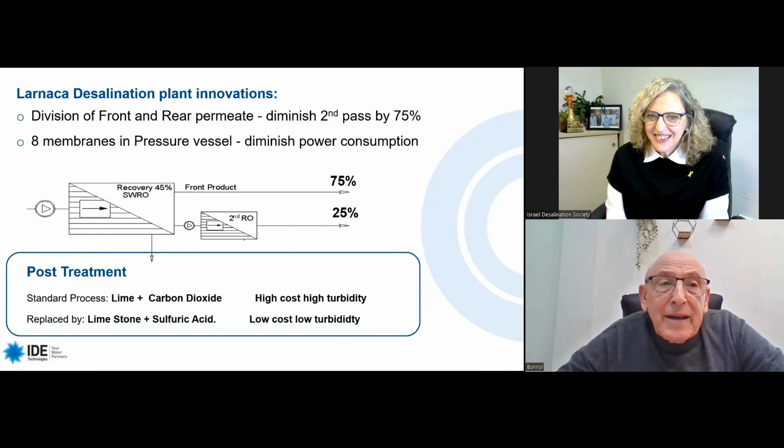But I solved this problem, and the project is working, I think right now, something about 30, maybe 25 years, a little less maybe, but maybe 20, 22 years. So this was the issue about Larnaca. I want to tell you something about Larnaca.

Yeah, okay. So I was selling membranes with Dow, and you asked for a quotation to work with 8 membranes in a pressure vessel, and then I got a letter from Dow and sent it to you, and in the letter it was written: don't even try to work with 8 membranes because it's going to be a big disaster. Okay, and as you said, you kept working, IDE and other companies working with 8 membranes in a single pressure vessel for almost 30 years.

Although people are still asking us if it is going to work, this is the moment to say, yes, it worked. Okay, so yeah, I have to tell you that also my very good friend Mark Wilf also supported me in going to 8 membranes, and he is a great person. I have to say I have had the pleasure to be his friend for a long time and learn from him, and we work together.

So the 8 membranes, part of the credit I should give to Mark Wilf. Definitely.

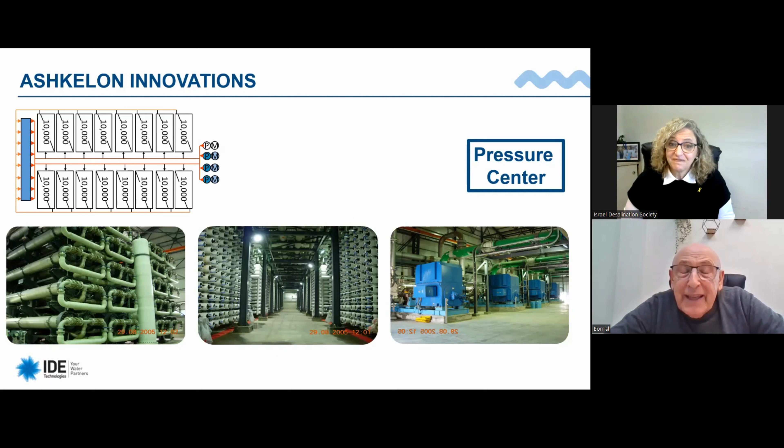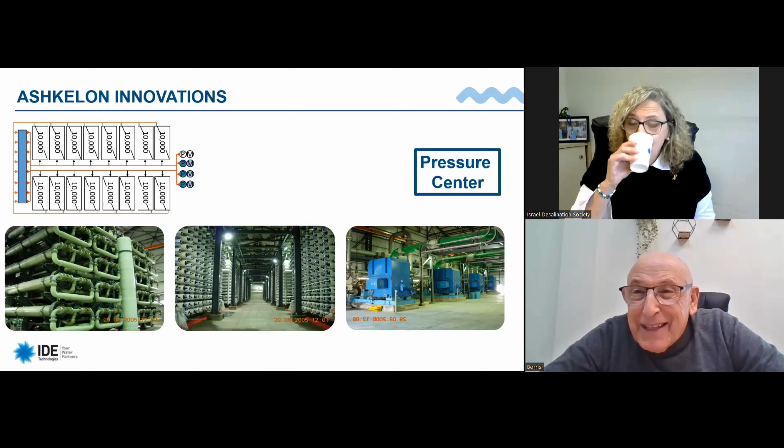I have to tell you, at this time of the tender, the ERI energy recovery didn't exist yet. It was in test. But a great person, Bill Andrews, published a paper, and in the paper he described that he made an energy recovery system with 98% efficiency.

So I explained to Bill Andrews that I'm going to pick up his innovation in the Ashkelon project and build a pressure center from it. He told me, 'You are crazy.'

But I have to tell you, Bill Andrews is a great person, absolutely great. He made his job so well. He worked on the commissioning of this energy recovery system and took part in the design of it. I have to tell you, he is a very, very high level person who helped us make this pressure center.

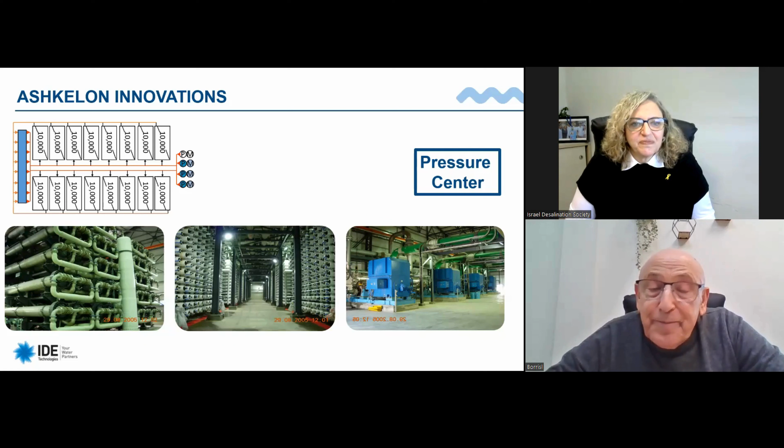In addition to the pressure center in this project, I used the Cascade, a boron removal system. You can see here in the Larnaca, we put the second pass on the rear products, but the recovery was 92%, because you cannot in the boron removal system have high recovery and high pH.

It is not possible. Magnesium hydroxide scaling and calcium carbonate scaling will plug your membrane absolutely. So it is not possible to have both conditions in one train.

Just to remind, what was the boron requirement here? 0.3 ppm, never achieved before. And before, all the technology mainly was built on the ion exchanger, which was expensive.

The difference is 6 cents per cubic meter. You will lose your project on it.

So I submitted the first patent in Israel on the Cascade, where we make 3 stages. First stage was high pH, low recovery. The next stage was high recovery, low pH.

We put acid, and the third stage was high recovery and high pH, but without calcium and magnesium, because both of them went out in the second stage. So the recovery was 98.4%, and we made this project which is still working till these days.

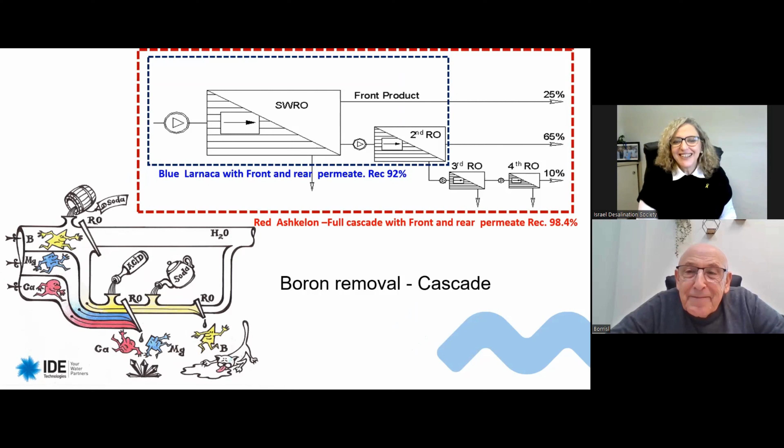I see, and I also see the very nice illustration that you are showing here, that your process is fighting with the boron, magnesium, and calcium. And no doubt Ashkelon was really and still is an emblematic project.

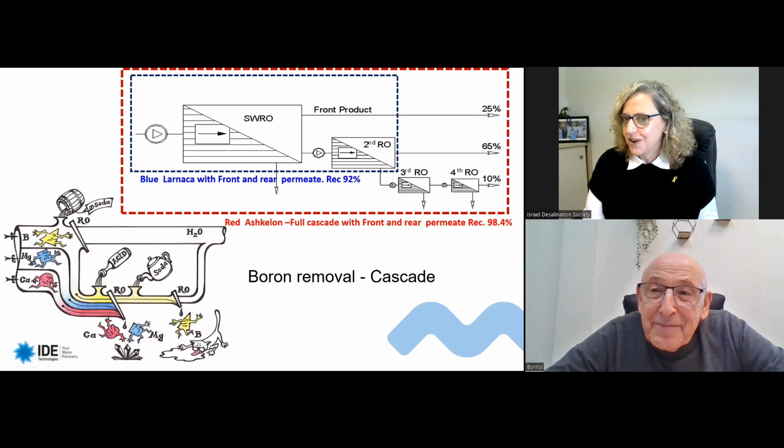And you must be very proud that it's working since 2005. But as Bill Andrews said, I don't want to repeat it, I will say that you were very brave here, starting with so many technological innovations. Is this true? Were you just crazy and brave?

No, I don't think so. I made 14 mathematical models calculating all parameters, the chemistry, the hydraulics, the scaling conditions, the pumps, interaction between pump and membrane.

For the first time, in one program I had the program of ROSA at this time, together with the program of the pump, together with the program of the booster pumps, chemistry, all things together. And I have to tell you, we have a math model of each piece of the pipes, all of them above 2 inches has a mathematical model.

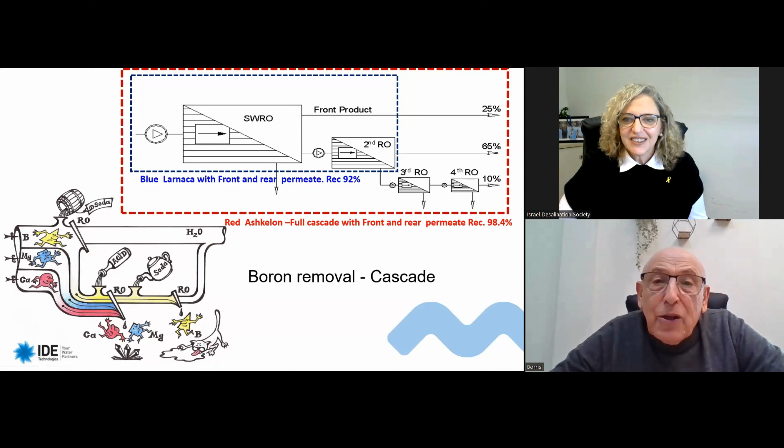So there was no brave at all. And I can tell you also something related to Carlsbad.

During the tender of Carlsbad, it was a very tiny place, and Poseidon looked to put huge capacity on this tiny place, and there was no technology which could fit inside this tiny place. So Nikolay Voutchkov, the third great person in my life,

looked at the pressure center and came to us, and he studied all 14 models. He came to every place in the plant. He talked to every operator, staying late in the plant, in the control room, to understand if it was indeed working well.

So it was checked by Nikolai in all possible ways before he gave us the green light to proceed with this tender. The Carlsbad plant is actually a copy of Ashkelon. We only replaced the DWEER with ERI, which was already on the market at this time, and it was local production in California. So this is practically one thing. It's the same front and rear product, the same Cascade boron removal, the same post-treatment. Only we changed the sulfuric acid for CO2, and the energy recovery.

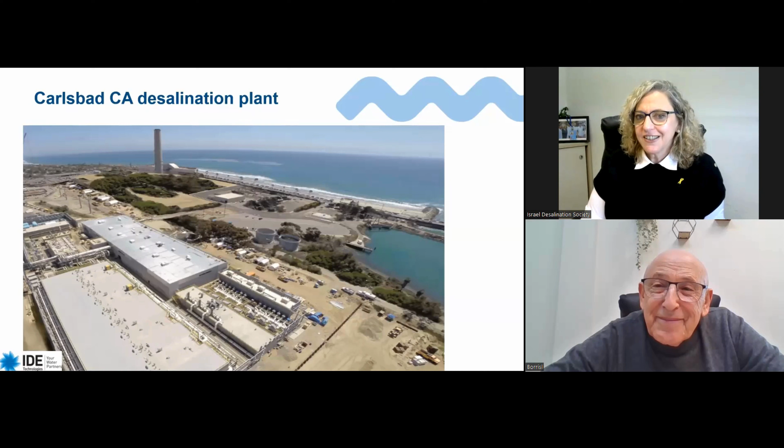You know, with Sorek it's a different story, because you cannot take a tender with the same technology twice. You have to improve it every time. Otherwise, you will not make money and not win the project. So you have to make it better and better for each project.

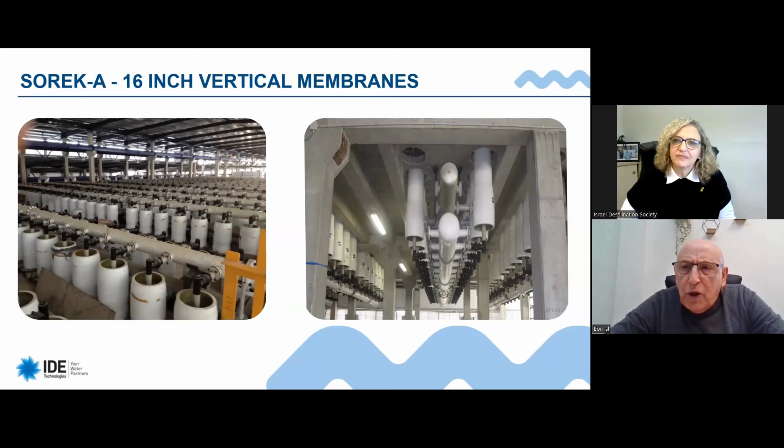But at the time of the Sorek tender, the fashion was 16-inch RO membranes. Every membrane manufacturer made 16-inch membranes. There was very, very high level interest in the world for 16-inch membranes. So I looked at the 16-inch membrane installation and arrangement, and I understood that in the horizontal position it cannot work. Installation is complicated, air evacuation is complicated, pipelines have many elbows, tees, and so on. It is expensive.

So what I did, I turned the membranes into a vertical position. And what happened? It's very easy installation because you stack all the membranes like sausages one after the other inside the pressure vessel - simple and faster than 8-inch. Air evacuation is very simple, all air goes out without problem. The pipelines are simple and straight because you have one feed pipeline, direct line, one brine line, and two permeate lines if you like to have front and rear, and that's all.

So the amount of pipes and elbows is diminished drastically. The cost is diminished. The size, the footprint, was two times less than even a pressure center. It is very, very compact. It's very easy to maintain because you have a flat level where you can access all the pressure vessels easily at the level of your floor.

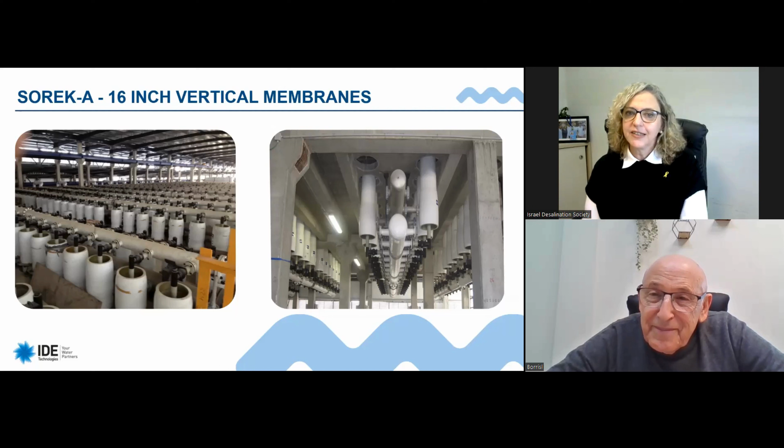Yeah, you are absolutely right. And the next thing I would like to briefly explain is the pulse flow RO.

In this point, I would like to give credit to Maagan Michael, Nadav, Barak and all the people who helped me in developing this project at Maagan Michael. Indeed, thank you. It is great people and a great place to make development.

But together with this, there were other people who helped in this, in some way. It is Professor Efrati and Rick Stover.

Those people were the first to understand that for brackish water, industrial water, life requests high recovery. And to reach high recovery, you have to make your desalination cycle shorter than the induction time. This was a great understanding that came from those people. They were the first to understand that high recovery means a shorter cycle, shorter than induction time.

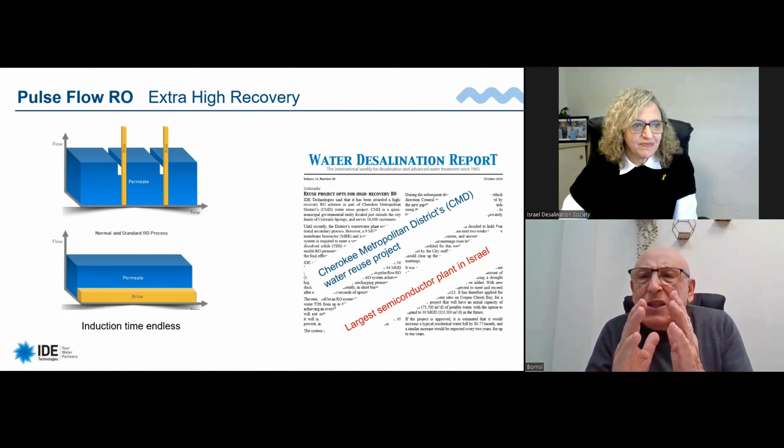Maybe in a few words I will explain it. You know, when you have a feed stream and you squeeze it, you reach a level of supersaturation, and you continue to squeeze it, you are in very high supersaturation, but no scaling takes place, because you start the induction time - the calcium and magnesium ions have to find each other to build a protocrystal.

And if you are able to remove your concentrated solution out of the pressure vessel before the induction time finishes and before you build your protocrystal, you can reach extremely high recovery. This is the great understanding of those two people.

In addition, those two people opened the market. It was a huge job to explain to the market that they may request high recovery. It is easy to come to the market when the client asks you, can you give me 95% recovery? But to bring the market to this position was a great job, very important. Rick Stover, together with Professor Efrati, made this job. They opened the market.

So the pulse flow came later. It uses the same approach of induction time, even shorter, because what we are doing in the pulse flow is within 1 minute squeezing the feed stream in such conditions that you are several times above the saturation point. But you don't keep this saturated solution in the membrane - you throw it out. So you work in a dead end mode, right?

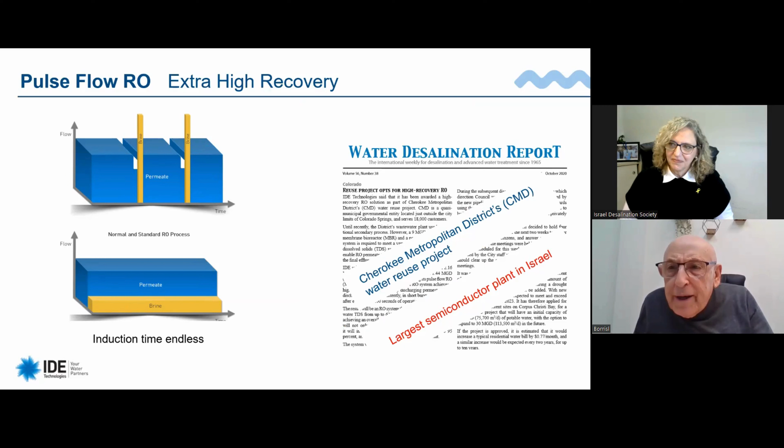Even if we are working 2 minutes in dead end mode, so we close the brine outlet, 100% is going to the permeate - recovery 100% for 2 minutes. Later you open the brine for 2 seconds, flush out all the concentrated solution, but silica is a serious story.

I would say it's a right challenge - now keep it at the level of 300, and maybe later we will make something better, but right now it is 300 ppm. We can work with it.

So this technology actually has been certified by different entities in the US, and I also see that you wrote here at the semiconductor plants. So actually it is ready for the big boom of wastewater reuse, potable reuse.

It is already a proven technology. So actually, I see that your innovations, we saw your innovations in seawater and also in brackish water. And so I don't know what any other type of water there is.

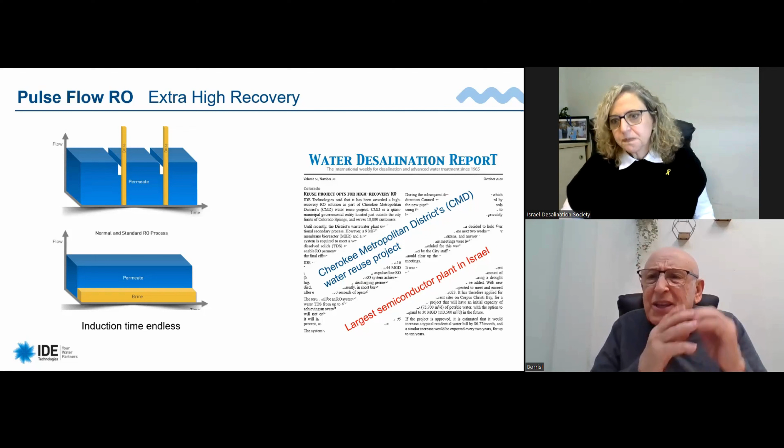I would like to explain a little bit about no chlorination, because bacteria can live in any condition - high salinity, middle salinity, low salinity, high pH, middle pH, low pH, high velocity, middle, whatever. They are able to live in any condition. They are not able to live in variable condition. If you have low osmotic pressure one minute, later high osmotic pressure, lower osmotic pressure, high osmotic pressure, low velocity, high velocity - this, they are not able to withstand fast variable conditions.

So we are not having biofouling. We make many autopsies. There is no biofouling in municipal wastewater, and this allows us to operate it without chloramine, without NDMA, without all this carcinogen related to the chloramine.

I would like to tell that in my best friend Nadav's plant in Maagan, we pick up the brine stream that he has in his RO plant, something about 80% recovery. We pick up this brine and make an additional 80% recovery on this stream. So we are reaching extremely high recovery. In Abilene, we make the same - we take a brine from an existing commercial RO that operates at 85%, and we made an additional, if I'm not wrong, something about 85 or almost 90% recovery. So I don't know in Cherokee what is the recovery.

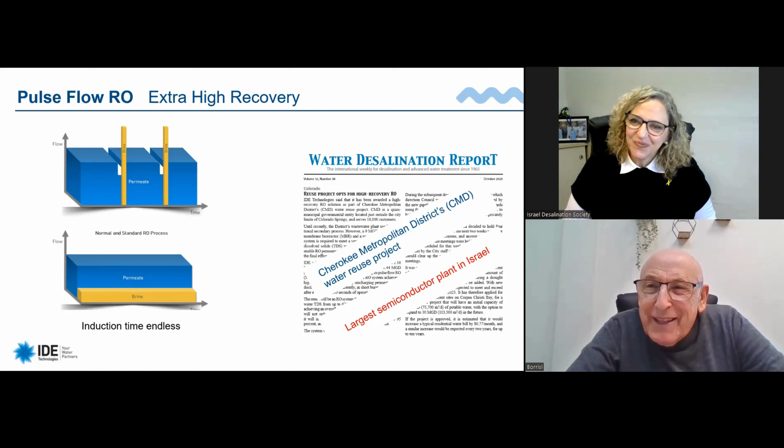So what do you have in mind now? What is next? There are several projects. One I will explain right now, the other maybe a little bit later, but I worked on osmotic power generation for a long time. The idea comes from an absolutely great person, Sidney Loeb. Sidney Loeb developed the concept of osmotic power generation. He was the person who developed the reverse osmosis membrane, but in addition, he developed osmotic power generation.

But there was a problem inside of this, concentration polarization and so on, so it didn't go so well. But I started to work on it about 20 years ago. I worked with Statkraft and we made a design. Later, we joined the Danish company, Salt Power, great company, great person. And we put a little bit of our technology inside of their osmotic power generation plant. And it works, it works very, very well.

The osmotic power is very suitable for Israel. It is very suitable for Israel because Israel has the Dead Sea, which is 26% TDS. It is almost 300 bar osmotic pressure. And the Dead Sea loses every day a million cubic meters a day to evaporation.